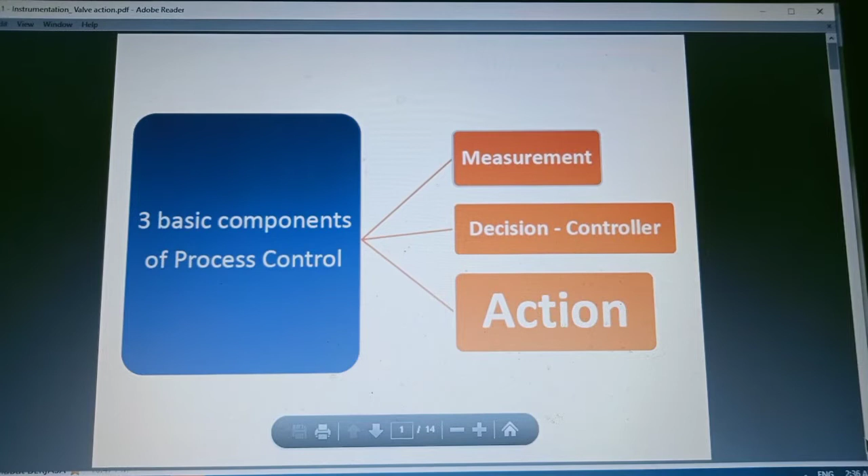So, for today's class, we will resume chapter 3.4.1, Instrumentation Valve Action. So, here we have three basic components of process control, which are measurement, decision (controller), and action. So our focus for chapter 3.4.1 here is action. So valve action, this is an example of a process control loop. We have process, sensor, transmitter, controller, transducer, and control valve.

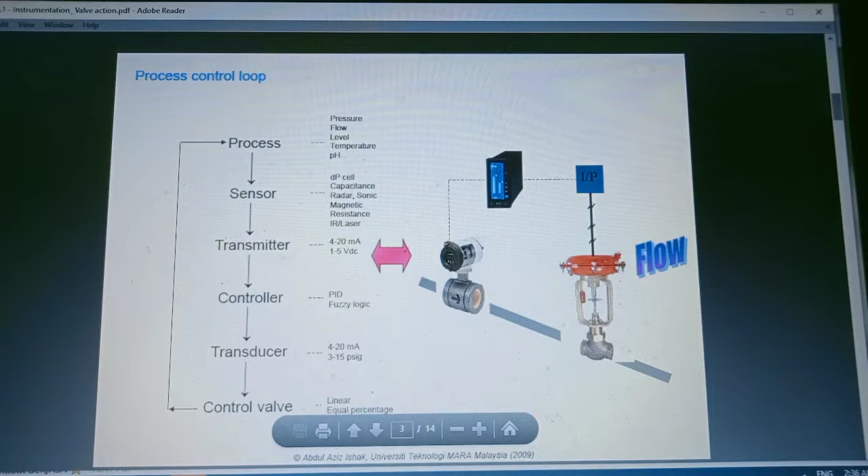So the information from the controller will be transmitted, will be sent to the transducer, and the transducer will send the output to the control valve. So the topics we will cover for the valve here are selection of action, fail position, capacity and sizing, flow characteristic, gain, transfer function, and type of valve.

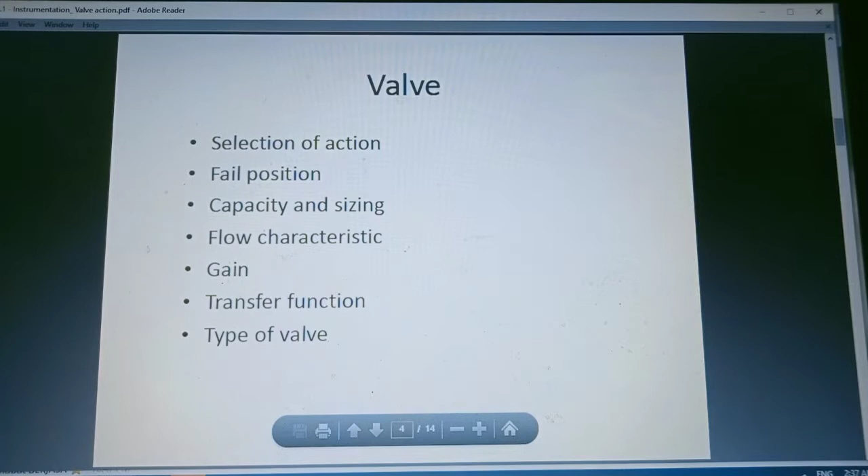So here, action. So the control valve is the most common final control element, right? Adjusting the flow that affects the control variable. This is the function of the control valve. So for example, our control variable in the example of the heat exchanger, we want to control the temperature outlet of the fluid. So in order to control the temperature outlet of the fluid, we must manipulate the flow rate of the steam in. So the function of the control valve here is to adjust the flow so that it will affect the control variable.

So the control valve acts as a variable restriction in a process pipe, right? So the controller output signal positions the valve and determines the valve position. The controller output signal is the input to the valve, and the flow is the output of the control valve. So the controller has an output signal. The output signal from the controller will be the input to the valve. So the valve will receive the signal from the controller, and then the control valve will do the action. So the output of the control valve is the flow, right?

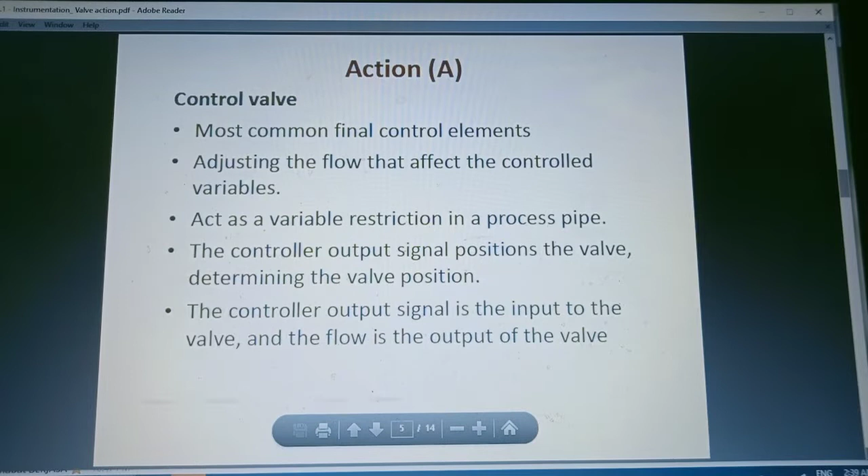Okay, in terms of input and output of the control valve, we know that the input to the control valve is the controller output signal, while the output of the control valve is the flow that is manipulated, right? So what is the purpose of the control valve? The purpose of the control valve is to regulate flow.

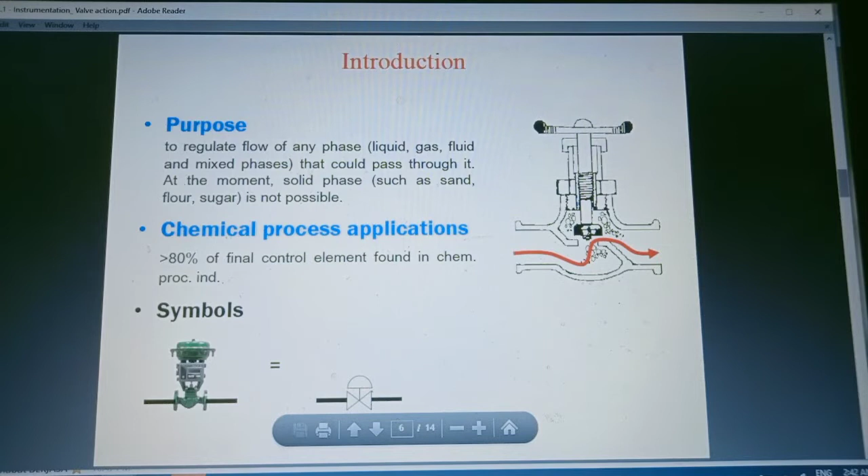So this is the real picture of the control valve, and this is the symbol of the control valve. Okay, alright, this is the construction of the control valve. You have the actuator and the body.

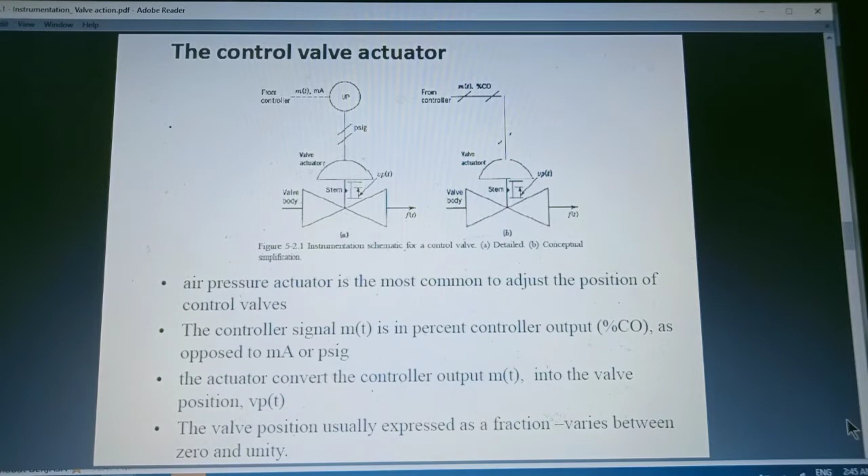So valve position is usually expressed as a fraction that varies between 0 and unity. Unity means 1, right? 0 and unity. When the valve position is 0, the valve is closed and the flow is 0. When we say that valve position is 0, it means that the valve is closed.

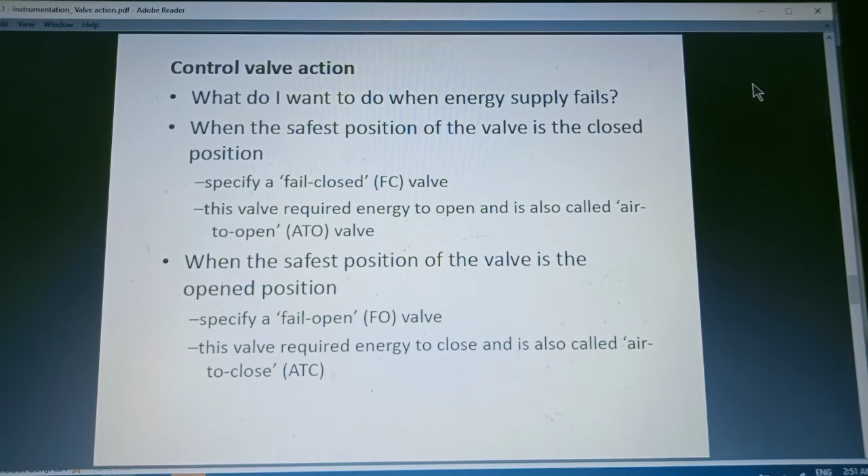Itu prinsip yang pertama untuk air to close ni, dia akan benarkan flow lalu di control valve tersebut. This action may save overheating of temperature related process such as catalyst heating or heating of polymerization process.

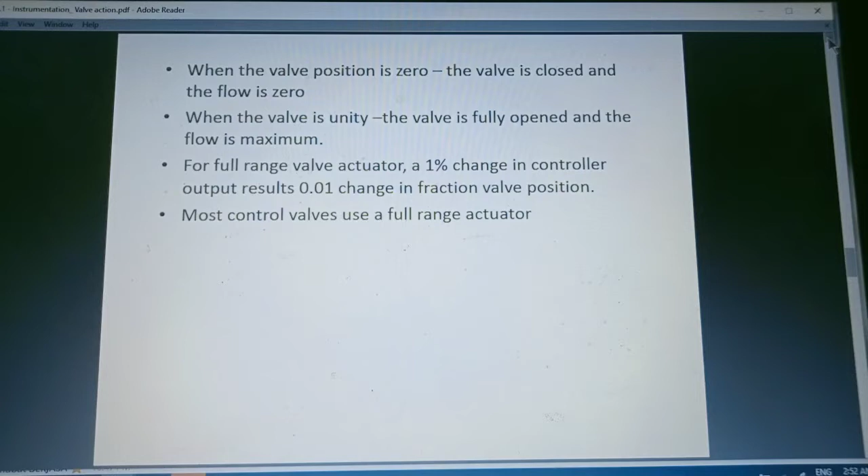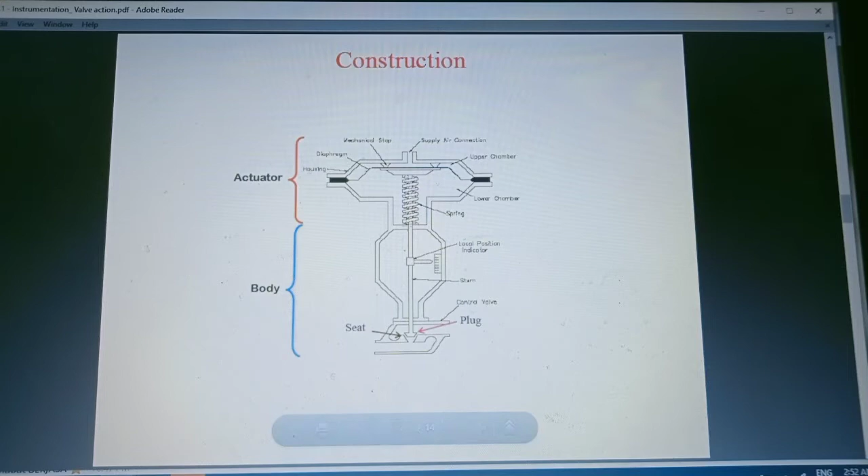So kita tengok dekat sini, air to close, air inlet yang masuk ni dia masuk daripada atas. Alright, and then dia akan push diaphragm here, and then what we call here, so we call this as spring and stem. Okay, so we have spindle movement with increase in air pressure.

Air dalam keadaan air tak ada, dia akan terbuka. Right, air masuk, air bertambah, air increase, then the air will push the spring, and then spindle movement will go down with increase in air pressure sampailah dia tertutup. Okay, bergantung kepada air yang masuk berapa banyak ya. Alright.

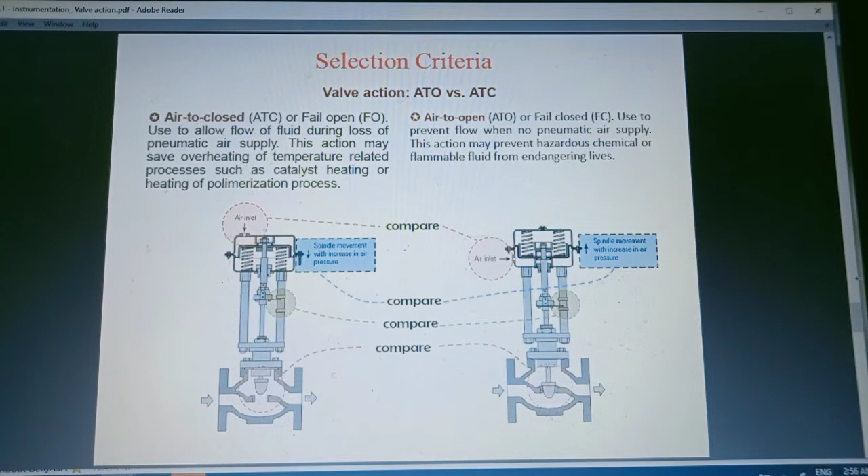Alright. So what we want each valve to do if the electrical or air supply will fail?